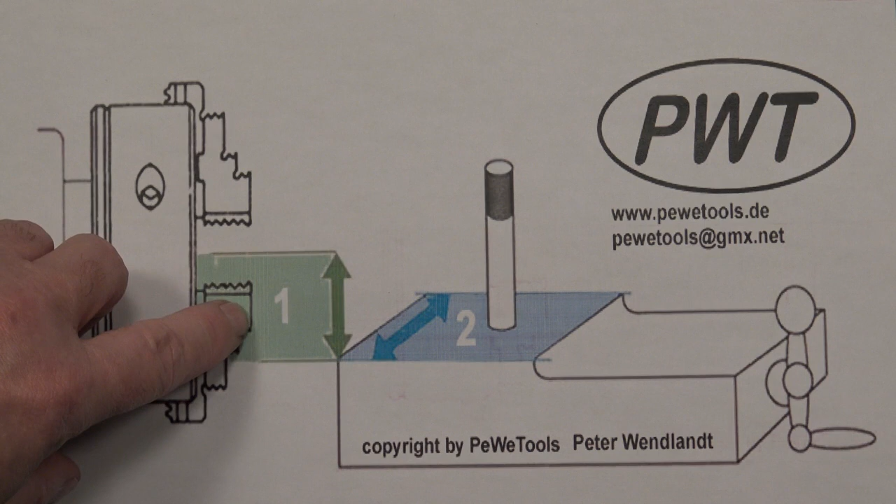So now I'm doing a special video for a special holder or a special solution. As you read in the title, it is a special holder for machines of the producer Weiler, Schaublin and Myford. All of these machines have the same problem: the distance between the compound rest and the center line, size number 1. All of these machines have the problem that this distance is very small. The result is, if you want to use a stable tool, you don't have space, because then the edge of the tool is over the center line. So what can you do? What is a possibility to solve this problem?

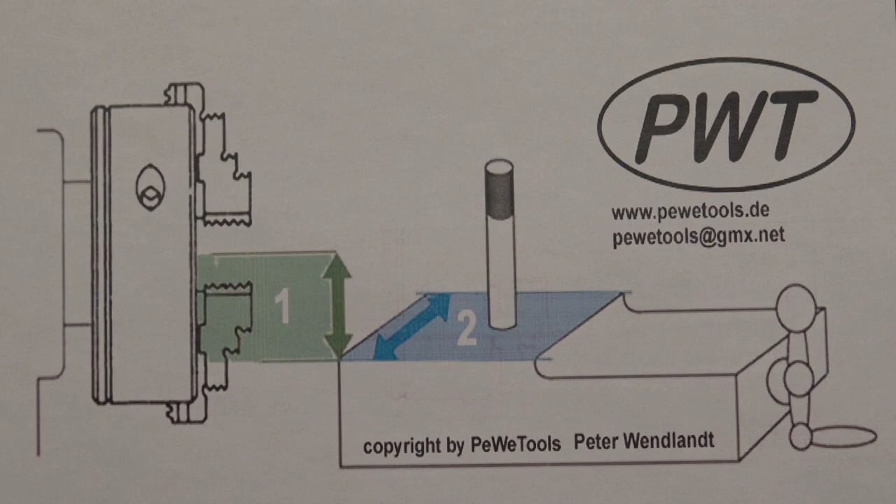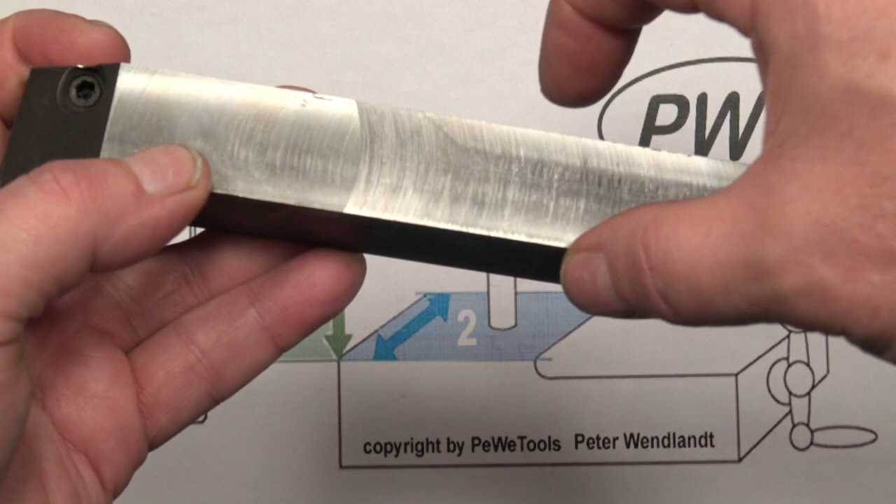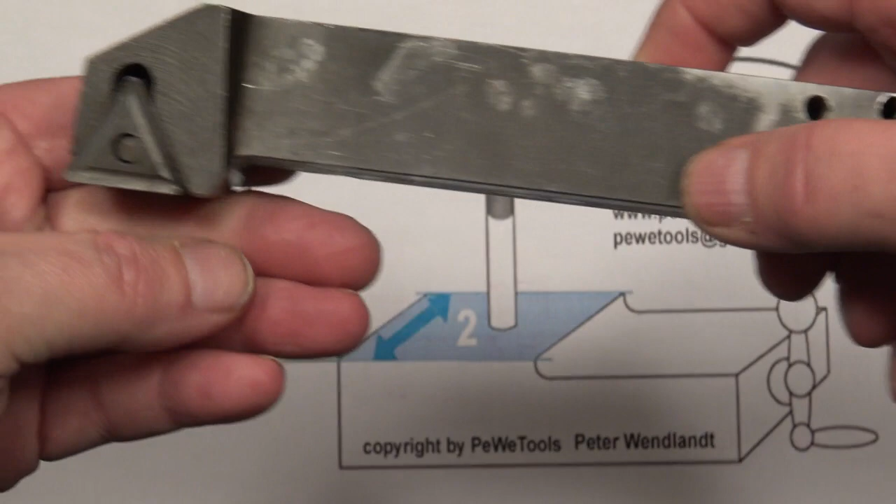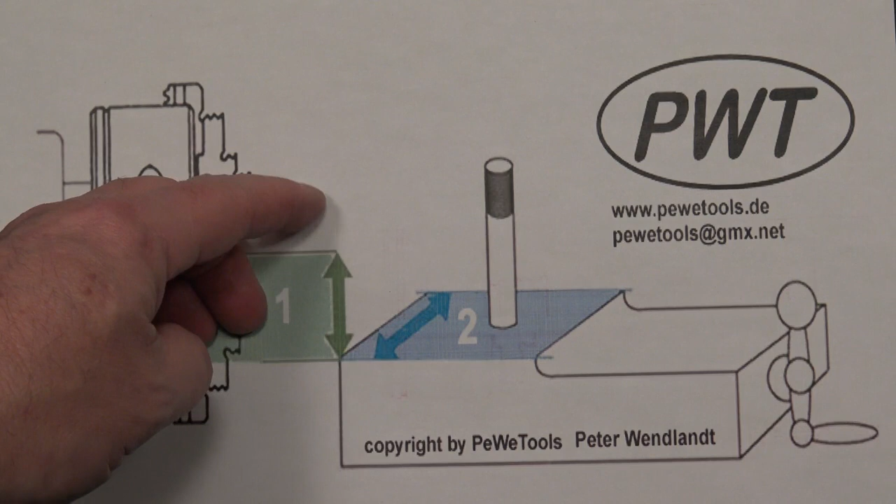One possibility is to work on the tool. I did it in the past, I show you here, it's a long time ago. This was originally a holder with a shank of 32 millimeters, a little bit too much for my machine. So I milled off material in the bottom, and now it's 25 millimeters, so I can use it on my machine. So if you have, for example, a 16 millimeter tool and you're not able to use it because the distance is not big enough, you can mill off to the size you need - 14, 13, 12 or whatever. You still have 16 millimeters in width of the tool, so the stability is better than just using a 12 by 12 tool.

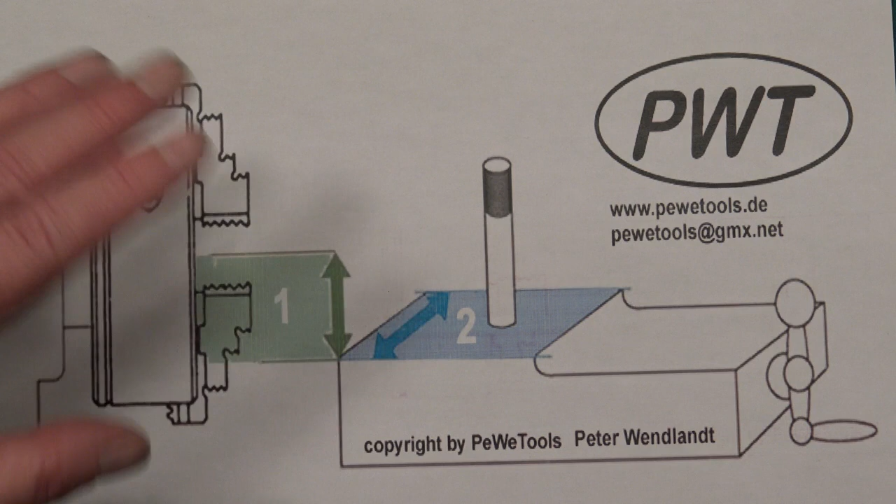So what is the next solution? What is the next idea? This depends on your machine. When you look at the compound rest, sometimes the machines have a huge, heavy duty compound rest, much more stable than necessary. So it is possible to mill off the top to get 1, 2 or 3 millimeters.

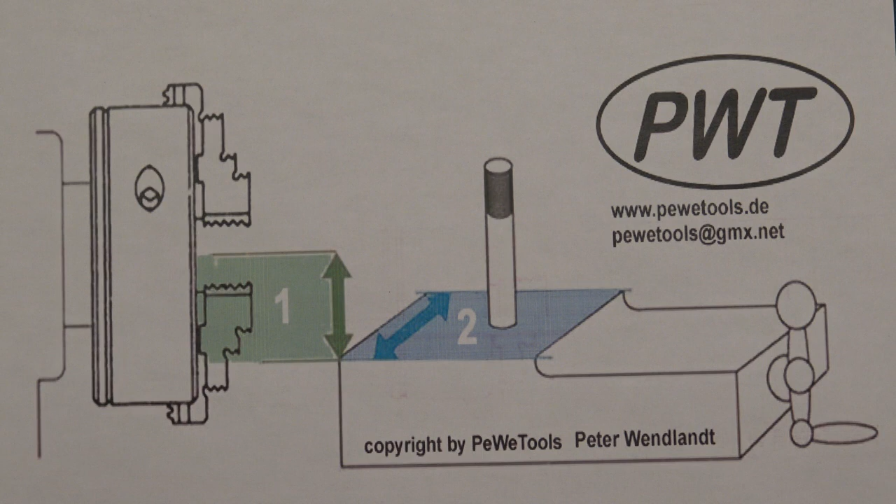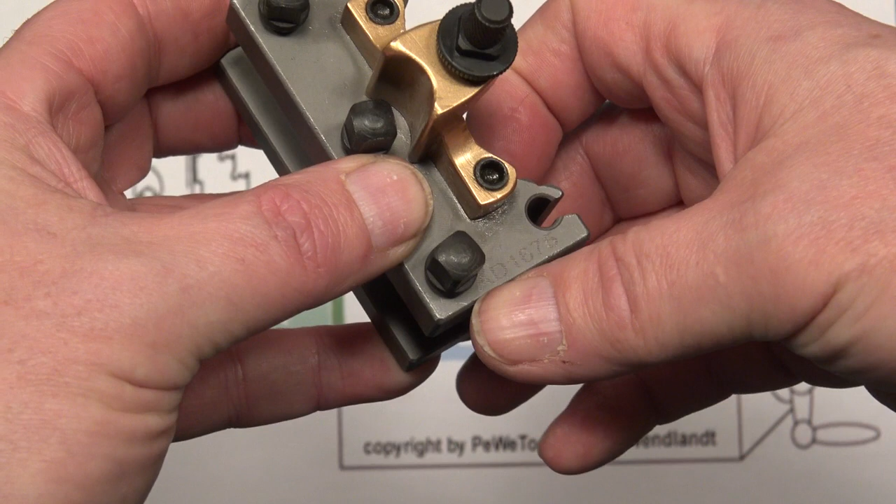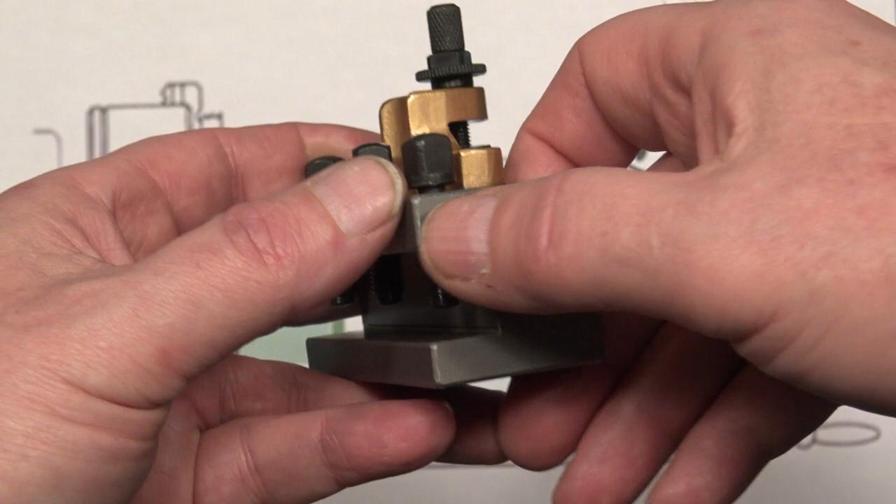And the third solution - now we come to the video - the third solution is of course something to do with the holders. I show you here a regular holder. This is size A, the holder AD 1675. A is the letter for the system size, D is for the type. It's a holder to hold tools with a rectangular shank. 16 means you can use up to 16 millimeters, and 75 is the length.

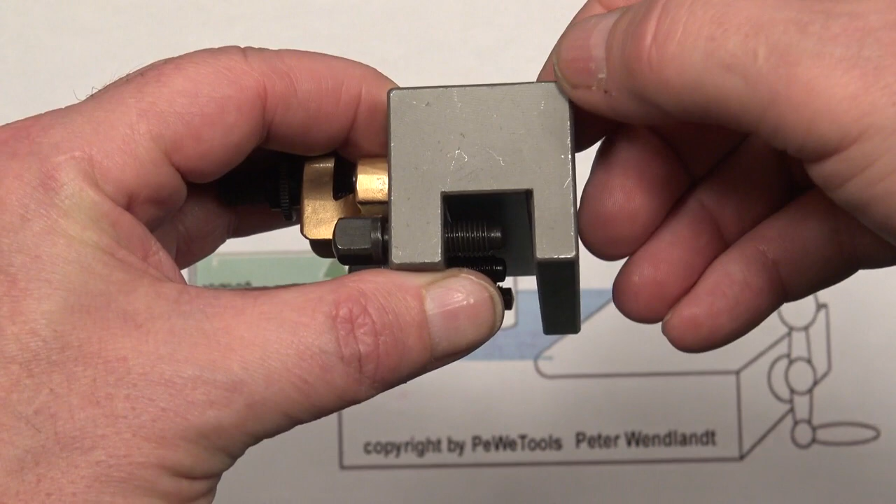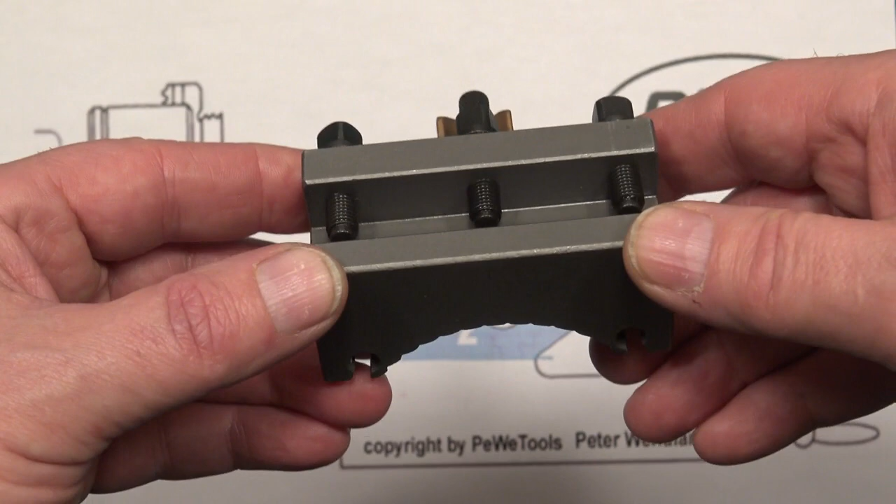So this is a regular tool, and now you have the idea to mill off something from the bottom, so this is thinner. Or you mill something off here inside. Right? It's a good idea? You agree? No, it's not a good idea. It's a bad idea, don't do this. It's forbidden, it's not allowed. And I tell you why: the holder is created and developed to safely take the force coming from the machine to the holder. If you cut off material here, it's not a good idea - it can break and you get damages, so don't do it. It's a no-go, absolutely a no-go.

The second problem is that when you mill off the hard surface here, the holder can get a little squeeze.

I don't know if it happens always or sometimes, but it could happen. So don't do it, and yeah, it's not necessary because we have the solution. What is our solution now?

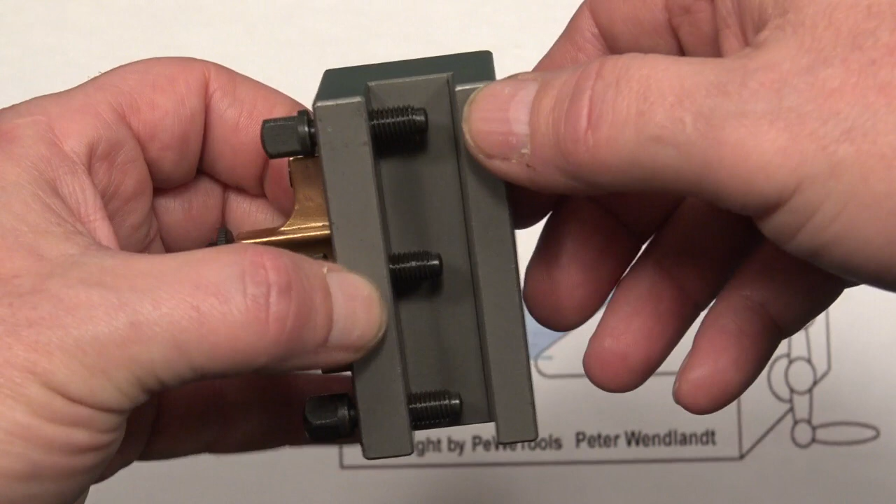Our solution is to cut here. Yes, you hear correctly, we cut here, but the point is we don't cut any material away. We make the slot a little bit more wide, and we do this before the holder goes to the hardening process.

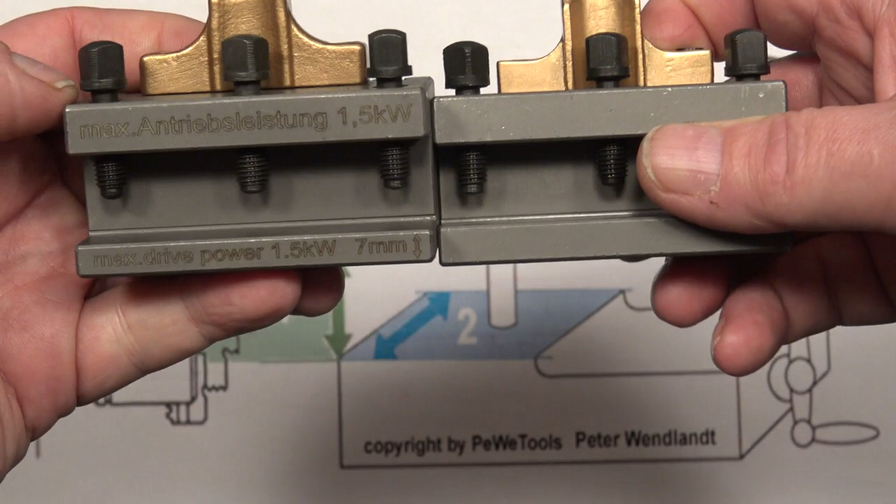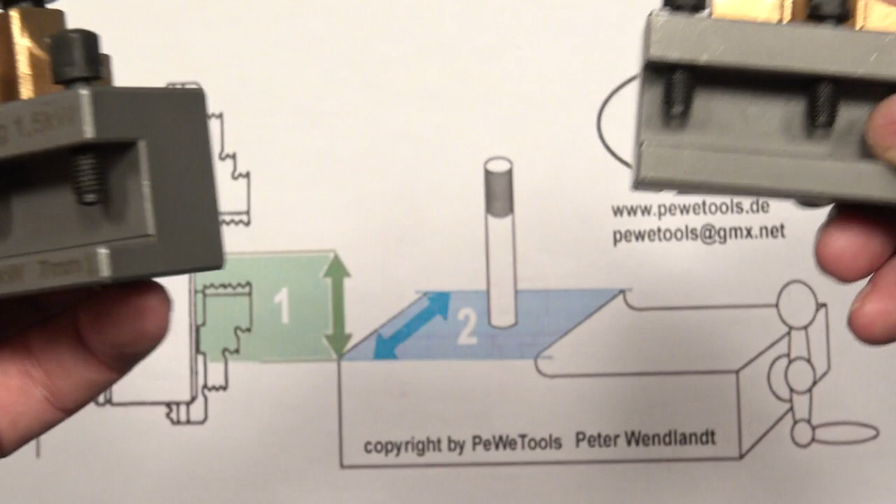When we do this, we also have to do one more thing. First, let me show you the solution. Here is the holder, and you can see it's 1.5 millimeters thinner, so you have more space for a tool.

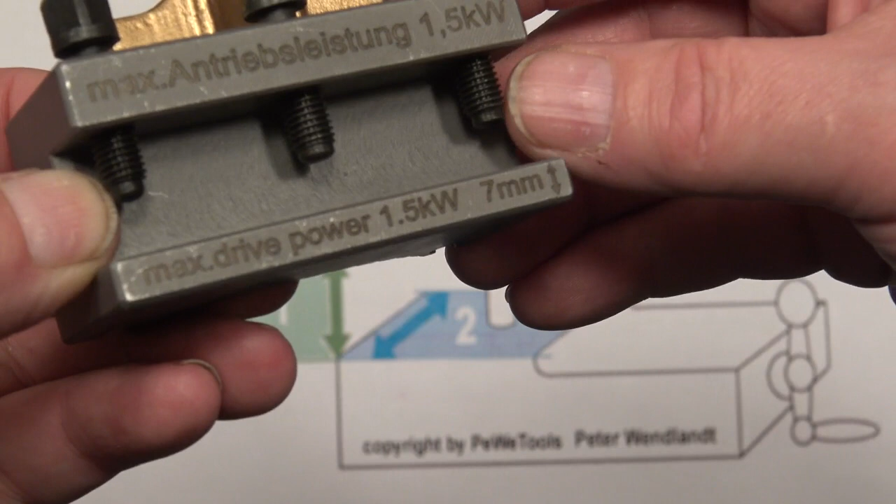This is the second point we have to do. You can read it here, in German and in English. When we make this thinner, we must reduce the maximum drive power limit to 1.5 kilowatt. The regular holder A has the stability to take 2.2 kilowatt.

Our holders, and the holders of one other German company, are different from all the others on the market, which only offer 2.0 kilowatt because they use cheap C45 material. We don't do this, we use a better material, so we can reach 2.2 kilowatt. If you want to count in HP, that's 3 HP.

But here now we must reduce to 1.5 kilowatt. This is not a laser marking, a laser marking is not really stable, you can brush it off with a steel brush. This is a deep laser engraving, so it's very stable, and you know you're only allowed to use it for 1.5 kilowatt.

Here you can see the second size, which is the same size, just longer. This is the model AD1690. And now the important letter S, S for small.

So these holders are usually in use for Weiler machines and bigger Schaublins. For the Myford, we have another solution, a special one, because the Myford is a smaller machine.

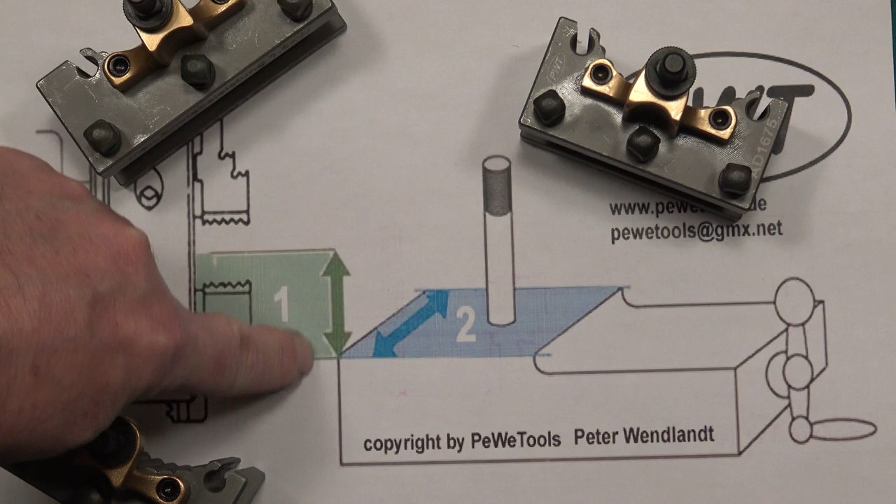When you have, for example, the machine model ML7, you will have a huge problem here. You only have 16 to 17 millimeters. So what type of tool do you want to use? Yeah, difficult, right? So we have a smaller one.

The best size for the Myford is size AS. The holder length is just 60 millimeters, and this here is only 6 millimeters. We have the laser engraving here, in the front or in the bottom.

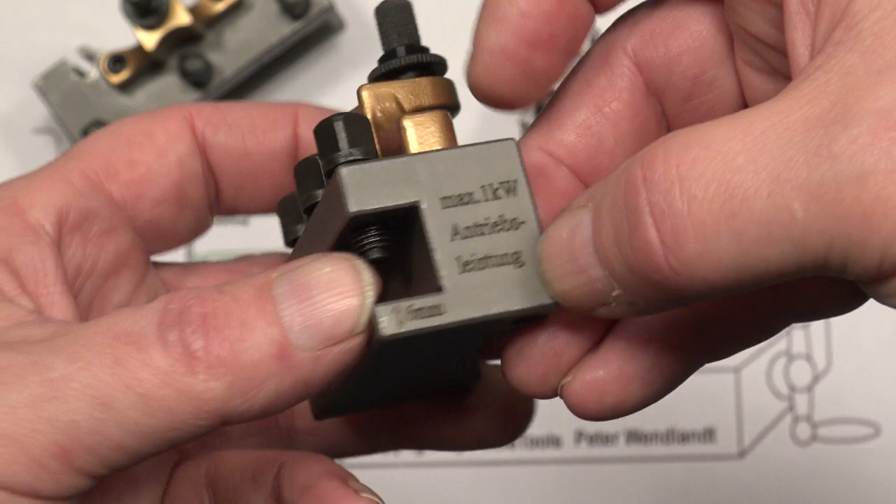And we have to reduce to 1 kilowatt, but usually this is no problem at all. The machines always have a motor which is not so strong, so this is the best solution for your Myford machines.

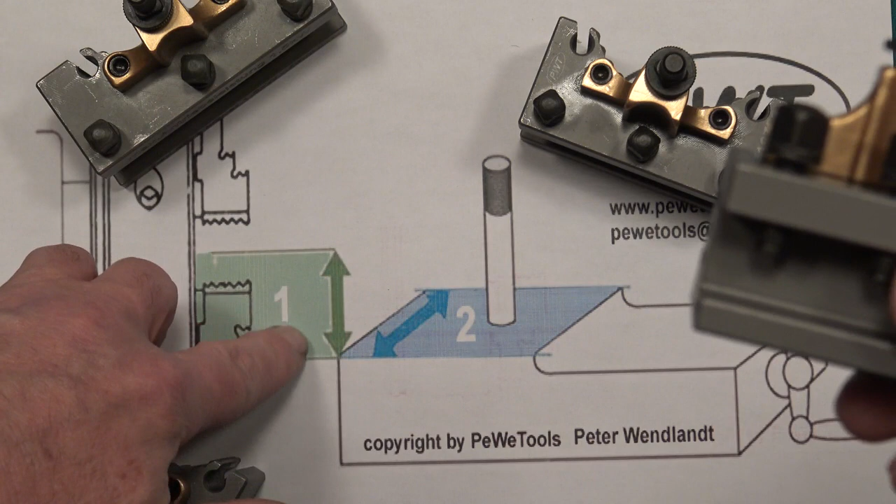Okay, so these are the special holders.